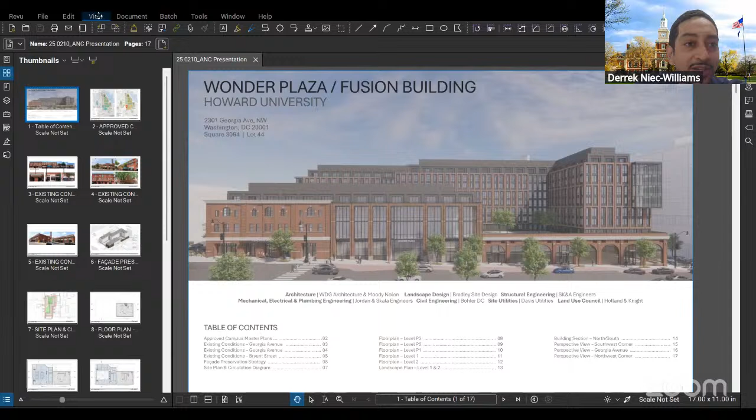As our counsel mentioned, this is further processing of a project already contemplated within our central campus master plan. You have a rendering of the project there, and the A&E team will run through the architectural details. If you jump to slide number 2, just to refresh everyone's memory on the project location, highlighted on the right-hand side with the red dashed line: it is Project J for Juliet, which in the master plan is known as the Fusion Building.

Programmatically, that building is in the master plan to consist of housing, inline retail, and a recreation and wellness center for the university campus—exactly what our project team is prepared to illustrate in terms of uses, configuration, and orientation of the design.

You might notice the notional massing here is an E-shaped plan that fronts most of the mass along the Georgia Avenue corridor, as contemplated in the 2020 master plan. You'll notice the orientation has changed, and we think for the better—we always try to improve the massing as we bring projects from master plan level into design reality.

This is one of a number of projects approved in our master plan, but it naturally sits on the Georgia Avenue corridor, right at the campus edge, and really needs to be a flagship for the university's campus.

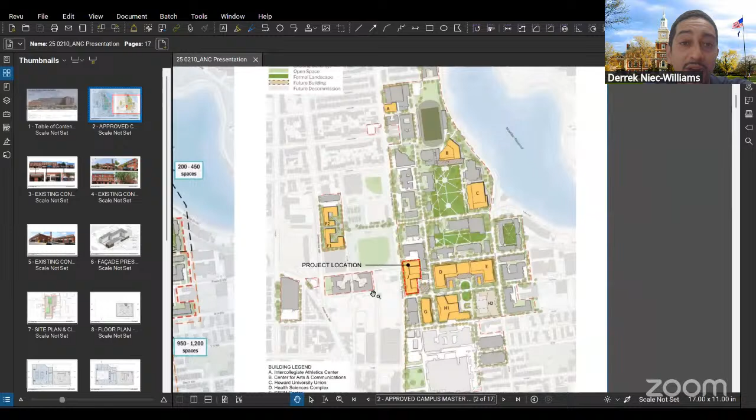Currently, campus recreation activities are all commingled with our athletics facilities on the north side of campus. The Recreation and Wellness Center seeks to decompress the north side for the 98% of students who are not intercollegiate athletes, and allow intercollegiate athletes more dedicated facilities that should enhance coaching contact hours and ultimately lead to more wins.

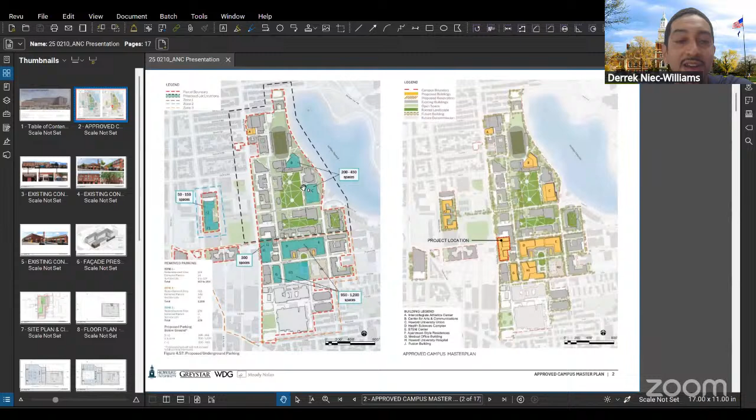So that's just an overview. The project calls for roughly 300 parking spaces per the master plan's parking plan, which I think we're approaching overall in by the numbers. The overall project concept here will ring true to what was called out for in the master plan.

As the design team brings you through the existing conditions and illustrates the historic preservation work we're doing as part of the project, you'll see why we believe this design is a great improvement on the original concept massing shown in the master plan. With your support, we look forward to developing this along the corridor to preserve relevant parts of the historic facade while infilling with new and vibrant uses. With that, I'll turn it back over to the A&E team to proceed.

Derek, can I ask you one quick question? Absolutely. Sorry, I just had a loss of thought here.

Was the zoning request for the change from MU2 to PDR to MU2 or MU4—whatever it is, I can't remember—finally finalized? The zoning commission did vote in favor of the modification, the map amendment. Final action will be on March 13th—that's when we should get the final order out, but we have directional approval there.

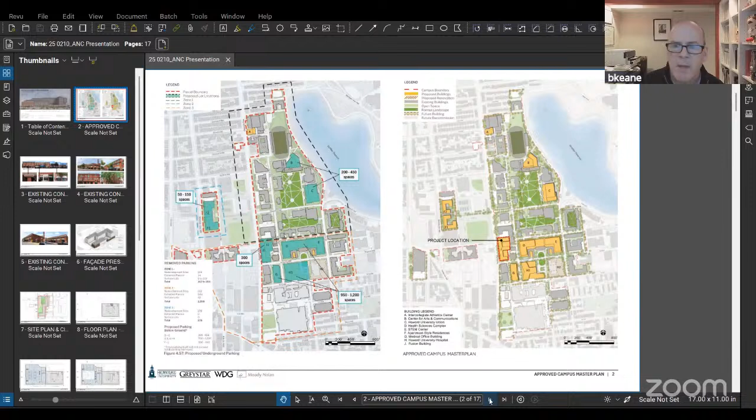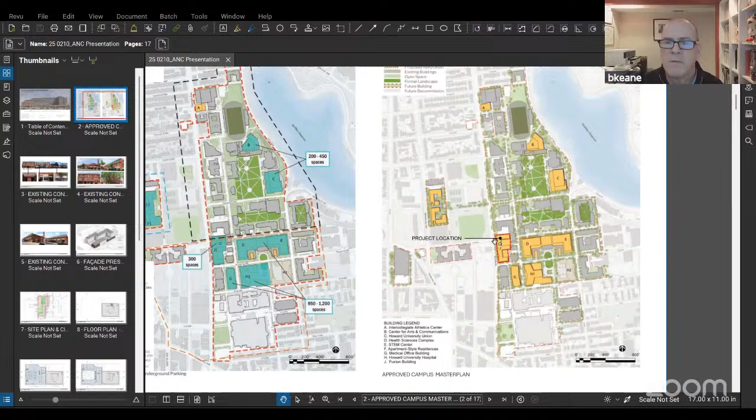As Derek teed this up nicely, he spoke about the fact that the master plan is this E-shaped building, where the courtyards were actually facing eastward. As you'll see momentarily, we've turned it around, and the courtyards now face both west and north. We pull the mass off of Georgia Avenue and highlight a couple of what we think are very special historic buildings that have been part of the neighborhood and the university for many years.

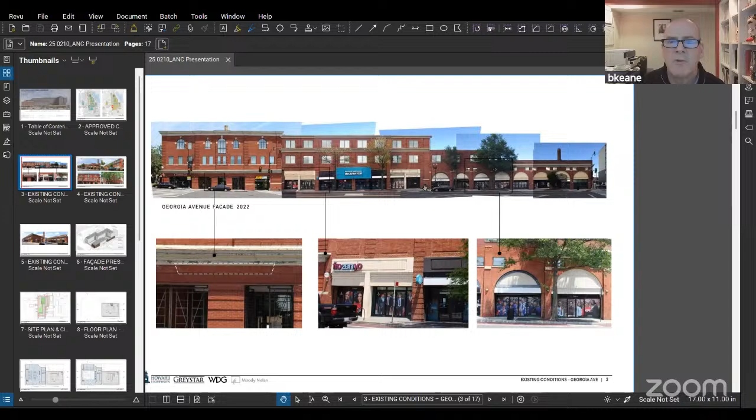You probably all recognize these buildings along Georgia Avenue. We're going to maintain the northwest building and the southwest building. We're going to remove the center building, which has been deemed somewhat chopped up and not contributing as much to the character of the neighborhood.

As we get to the corner of Bryant and Georgia, you start to focus on what I call the arched building. It's a very tall one-story building that used to have a bunch of bread trucks in it, as some of you know the history of the site.

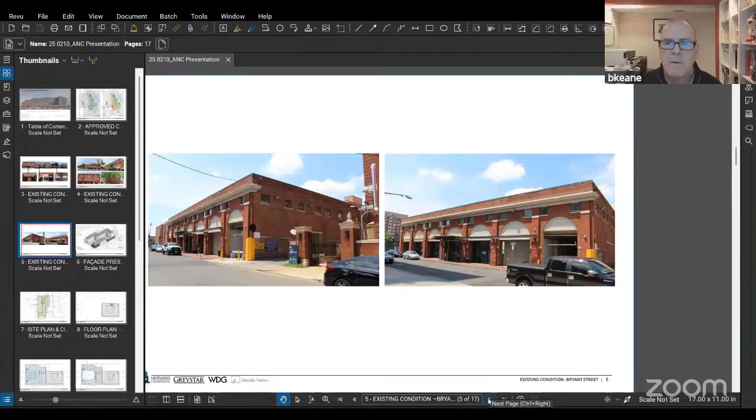As we go around further on Bryant, you get to the alley of Bryant Street next to the power plant, and the massing has changed dramatically. We've created what we call a stepping Z shape that has a prominent corner at Bryant and Georgia, but then it sets back and steps along the alley, pulling the 8-story residential tower back from Georgia Avenue and letting the two historic buildings shine.

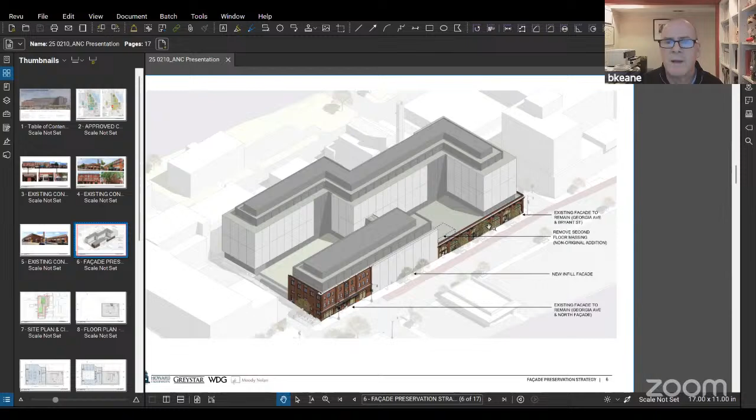Between the two historic buildings, we have a building facade that we call the infill building, and you'll see that momentarily. The site has a wonderful industrial history, and we've tried to honor that history in the way we approach the architecture.

This is where our residential entrance is. Students will actually enter the north courtyard, walk across it, and enter the building. There's a little 3-story link that connects the 8-story tower to the historic northwest tower and the infill building.

In terms of daylight, this new south courtyard is going to get wonderful daylight with south and west sun coming directly in. The north courtyard will get some shade from a 3-story wing, but 3 stories isn't too bad in the scheme of things.

As we continue walking around the building, there's a second residential entrance off of Georgia Avenue. There's about an 8,000 square foot dining facility off of Georgia, and about 12,000 square feet of retail entered from Georgia Avenue and Bryant Street. Entering the parking garage will happen off of Bryant Street and off of this alley, as well as loading.

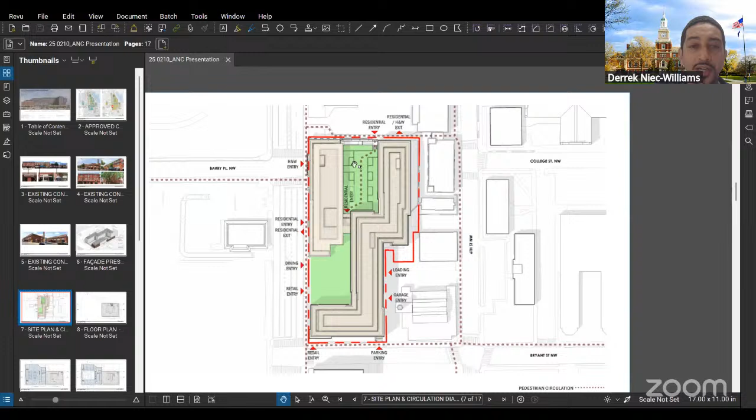In this setup, you're able to have a cloistered courtyard that serves as the residential entry, providing a buffer from the hustle and bustle of the Georgia Avenue corridor and likely better pedestrian safety. But in addition, roughly one level above the Georgia Avenue corridor, there will also be another courtyard that daylights and fronts onto it, overlooking that corridor. That provides opportunity for see-and-be-seen, summer programming, et cetera, which I think will breathe more life into the corridor than just a straight curtain wall of a building.

I just thought I'd point that out because we thought that was a great amenity that will greatly enhance the corridor and provide some differentiated environments for folks.

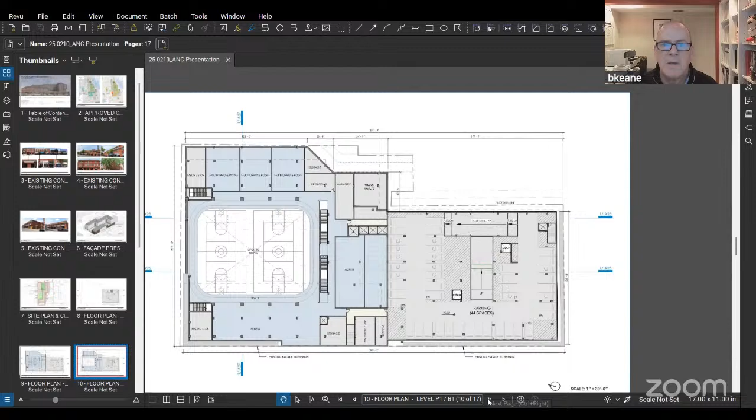So we come up to the next level of parking, and again you're looking down into the gym. There's a running track around the courts, and you start to see multi-purpose rooms, administrative offices, and some other fitness space. You go up to the next level, and we're now at the Georgia Avenue level.

As I mentioned, on axis with Barry Place is the entrance into the health and wellness. There's going to be a juice bar that's very visible to Georgia Avenue, a pro shop that's very visible to Georgia Avenue, and a gaming area that's visible to Georgia. So the intention is pretty clear that we're really trying to activate the Georgia Avenue frontage, and the programming at the health and wellness is going to do that.

This is our second residential lobby for students that are not coming in from the high campus level entrance above—they can enter off of Georgia Avenue. The dining facility I mentioned is right here, about 8,000 square feet. Retail is about 12,000 square feet, with entrances wrapping the corner of Bryant and Georgia Avenue. You can go into the alley and down a ramp into the garage, where trucks will come in and do loading and servicing to the building.

Also, one other comment is that the dining facility shown in that light yellow color is not an exclusive, student-only venue. It's intended to be open to the public, but it'll offer different food options that are more price sensitive to our student population. So I just want to highlight that it's not a restricted access thing—it's something where the public can come in and purchase meals alongside students.

So as we get up to the courtyard level—as Derek was describing, this is a tall 1-story, so you're about 20 feet above Georgia Avenue when you're on the south courtyard. As students come in and cut across the north courtyard, they'll enter the building into a lobby.

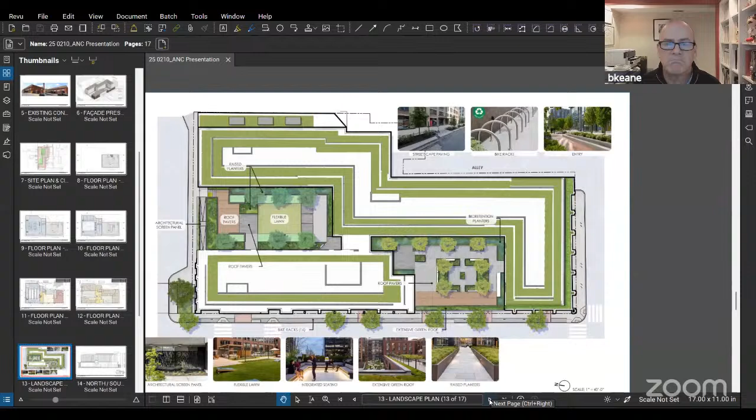You can see the tall basketball court volume is completely below grade, and you see the running track, the dining, the retail, and the 3 levels of parking. So it's a pretty intensive program in section, with a lot of things happening below grade.

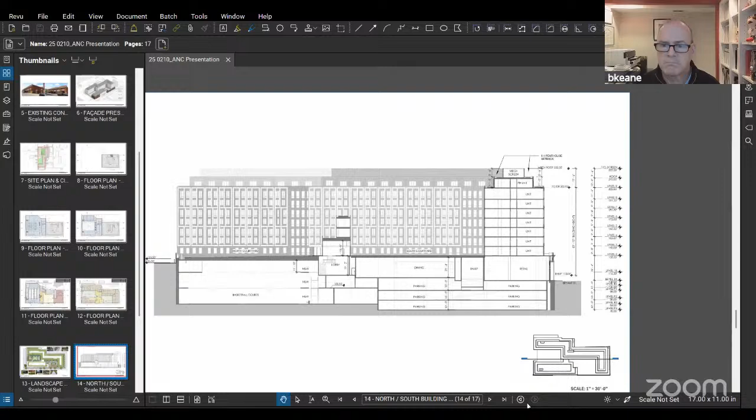So these glass openings are going to be set into the wall about 3 feet so that when the doors open, they're not swinging into open space. So the building's going to have a lot of depth.

And then you see the infill building, and then you see the other historic building off in the distance, and we'll see that in a minute. And so we developed this double height masonry grid system that has a slightly irregular pattern, which we think gives it a nice kind of dynamic quality.

And then on the corner, we've developed what we thought is kind of an interesting acknowledgement that this is a gateway intersection for the university. So we created this more transparent, glassy element on the corner of Bryant and Georgia.

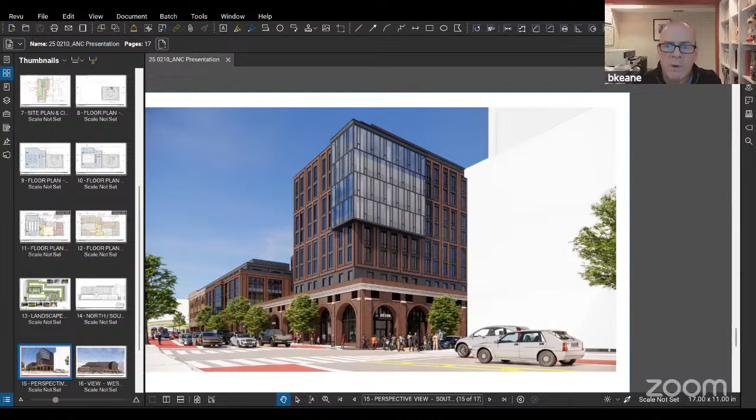Obviously, the courtyards are not developed in these views, so more to come on those, of course. But I think you get a sense for the overall composition.

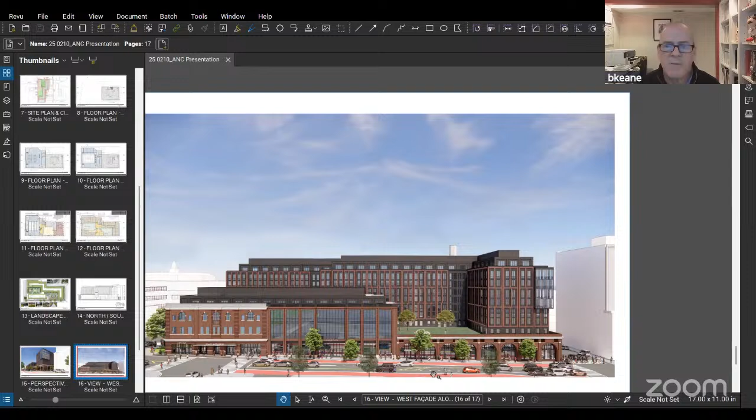And you get a sense, if you could imagine, the master plan had this as just a giant wall. And what we've done, I think, is a much more delicate, much more sophisticated approach, which is maintaining the historic character of the site and of the neighborhood and of the university, and sort of pushing the mass back off of Georgia Avenue, which we think will make a much more pedestrian-friendly environment.

And then students will be traversing through this parking lot, through the passageway towards 6th Street, or they will cut into the north courtyard and walk across the courtyard and enter the building.

We're obviously excited about the project. The development's come a long way. It's been a pleasure working with Derek and Howard University, and of course Greystar Development as a great team. And we'd love to hear your comments.

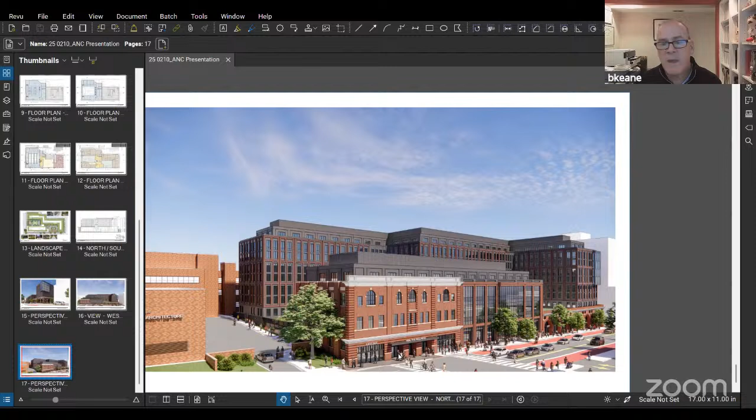That's the condition today, and so students will get on that walkway and then they'll step up onto this courtyard, or they may already be down on Georgia and they can enter off of Georgia Avenue. There's 2 means of access, one from Georgia Avenue and one that's cloistered in the courtyard that's behind the historic building.

Okay, so then, Derrek, maybe you can answer this question, and I'm just trying to think through some stuff here. That walkway is not a permanent, it's part of Howard's property. So what is the potential for down the road that might it be an issue relating to doing something with that parking lot and creating a building?

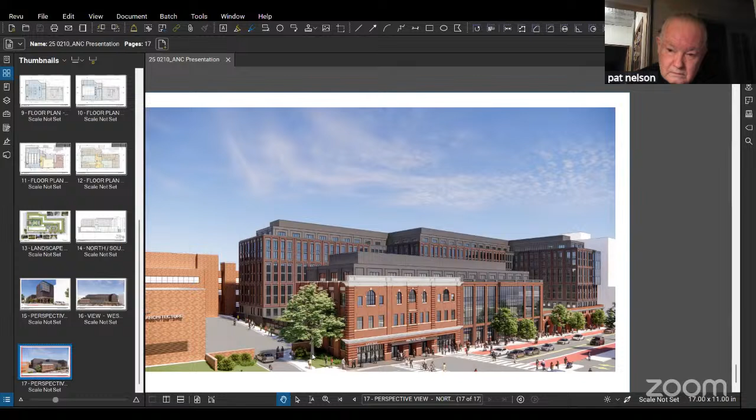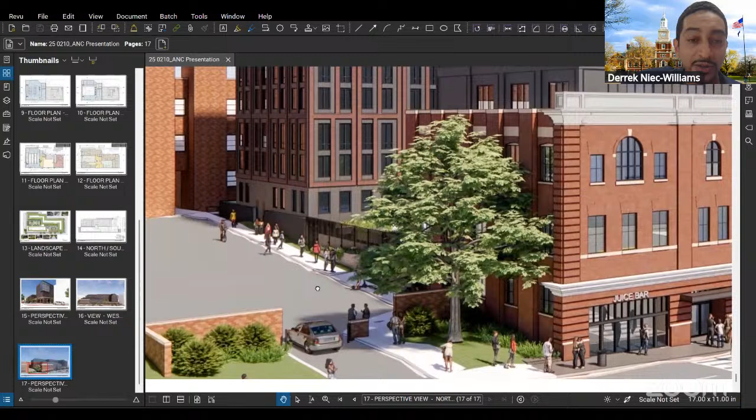I think that's a major pedestrian connector. If you watch during the normal academic day, a huge number of students, particularly those living in Howard Plaza Towers on Berry and those residing in Trellis House, cut through this corridor. Through this project and other means and methods, we really seek to memorialize and further improve the pedestrian environment in that corridor. There are no plans to knock down the College of Engineering building or the parking lot that serves it, so through this project we should greatly enhance that corridor and improve the student experience along it.

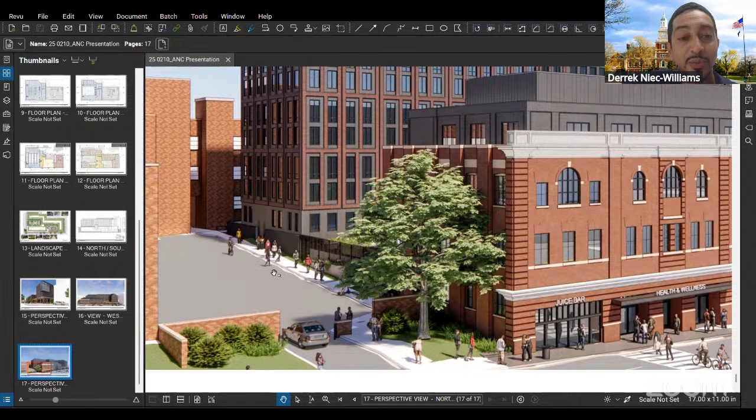So it's not as much an afterthought as a pass-through because of the convenience of the number of steps it takes, but it actually becomes a place that's more significant and memorialized. On one side it's a surface parking lot, but on the other side there'll be a beautiful, wonderful courtyard that students will have access to.

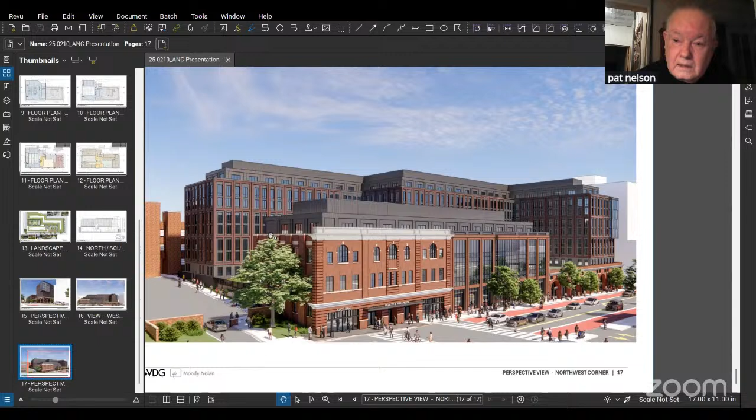So then my last question, since you are changing around the design of the building, and I understand that makes sense, I'm fine with that. Is there thought to expanding the sidewalk and beautifying it to make it more of a pedestrian way, maybe putting some tree elements in there to make it really look like a connector between 6th Street or 4th Street and Georgia? Because right now it doesn't come straight through except for that little opening there.

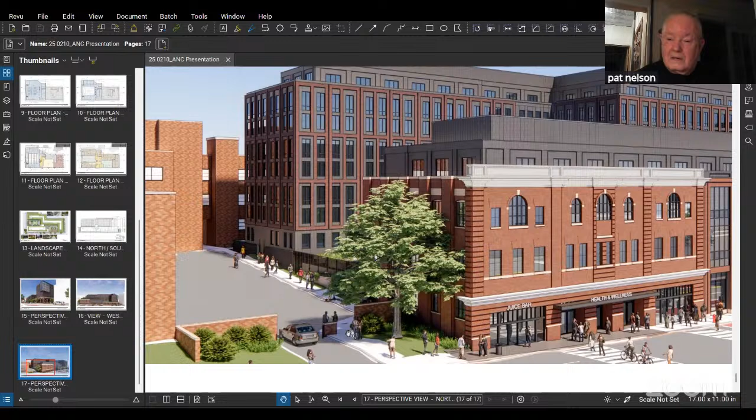And if you're doing this as a walkthrough, I think at this point, if you're doing major construction, you'd want to do something to either take away some of the parking and make the sidewalk wider, and put some tree boxes or seats or something, just so it really becomes the pedestrian way you're talking about.

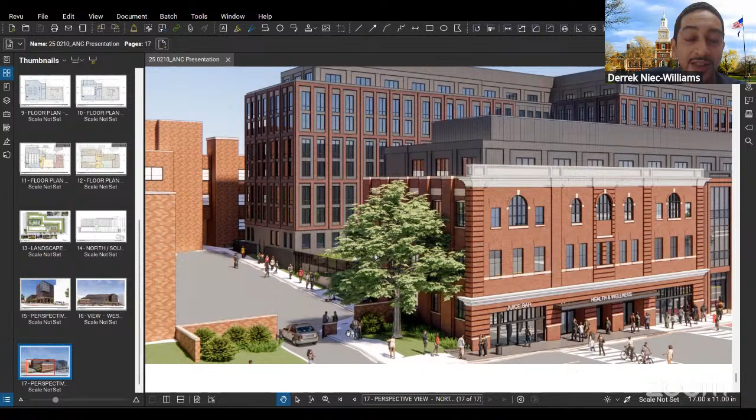I think those are all things we can explore. On the other side, you'll have faculty with their pitchforks and torches, not happy about losing their parking, so we'll have to balance the outcome there. But I think there's definitely a way that pedestrian environment can be improved through this project and through coordinated action. As we get further along, I think that's something we'll definitely look to realize on the job here. Thank you, Pat and Derrek.

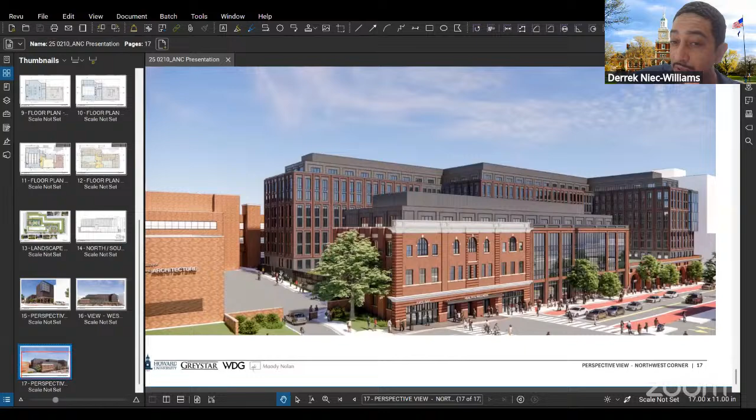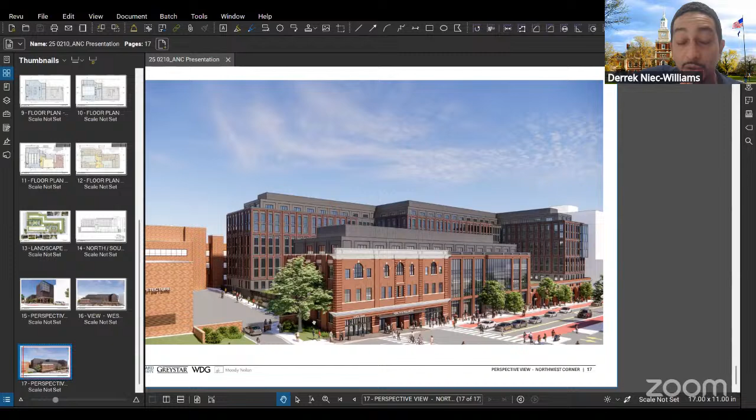Sorry, to your earlier question about the sidewalk, I don't believe we are greatly increasing the depth of the sidewalk. I'll let Bob or Chloe speak to that more specifically, but given where the historic facades are placed, and the fact that we're not moving them, we could technically notch back a little bit, but it would create a disjointed, not continuously consistent width along the sidewalk realm there.

The answer is, the historic buildings are kind of holding the original building line, but we are in fact creating more elbow room on Georgia Avenue because we're pushing all these facades back at the street level. As I mentioned earlier, you can see this is about a 3-foot deep archway now. The facade used to be right on the face of the building line, and now these are all pushed in 3 feet. So starting from this point down, there is in fact more area on the sidewalk, opened up so you can actually walk through, where right now you just walk on the sidewalk.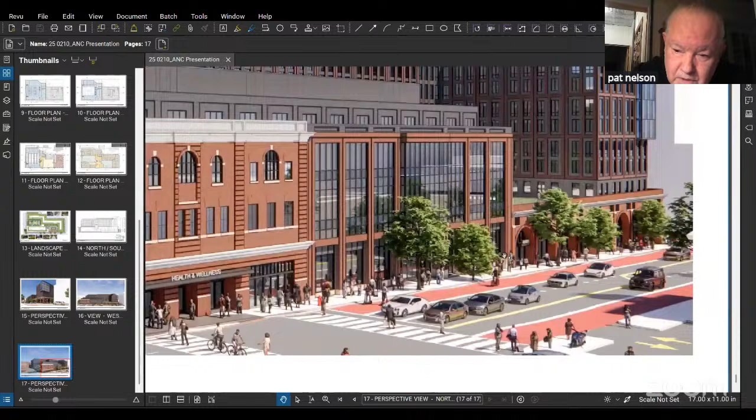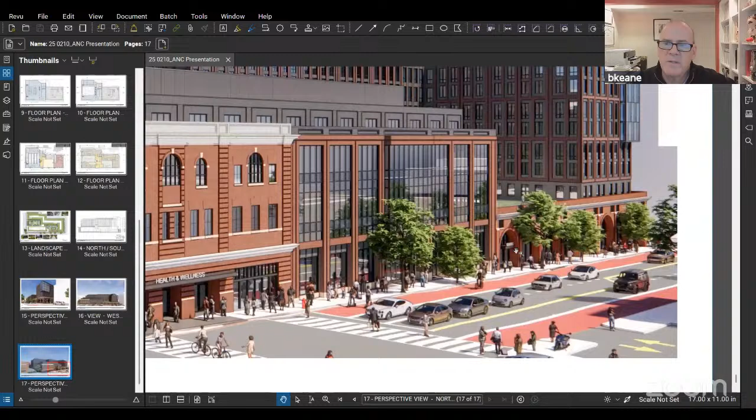It's a series of deeper openings. It's not like the sidewalk is wider so you can walk straight down — you can't really experience the space that way. But if there are tables and chairs outside a dining facility or one of the retail facilities, there's going to be a little additional area for tables and chairs on Georgia. So basically the superstructure, the brick, is right at the property line, but there will be more alcoves, I think is the right term to use.

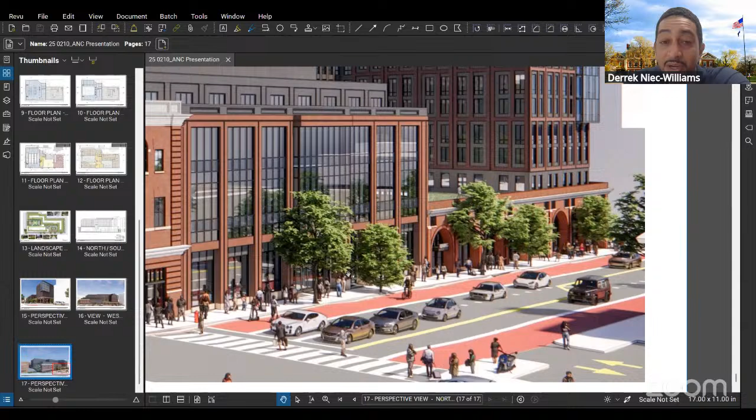Yeah, that's a good word, step down the corridor south of the northern historic facade. So to answer your question, it's like yes and no. Will it feel more open? Yes, but will it actually be a contiguous sidewalk that's wider? No, the columns will have to stay where they are. We've pushed the curtain wall facade back a little bit so there's more alcove space, so the public realm feels larger and there's more elbow room to maneuver. I think that will greatly help with wheelchair navigation on this particular block because there are some pinch points that are a little bit outside of DDOT's standards.

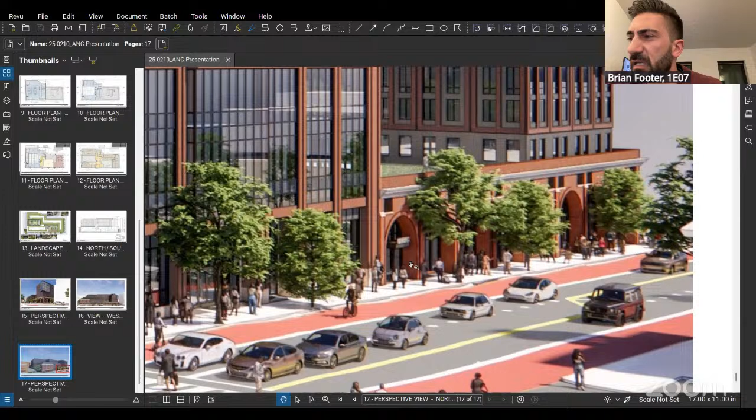Just for clarification, I'm looking at the current structure right now, and it is set back—the windows are not flush with the brick, particularly in those archways. There's some white concrete or something that's almost flush, but where people go into the actual storefront, it looks like maybe about 1 to 2 feet. Are you just suggesting you're going to bump it back more? It's about a foot, you're right. It's going to go from 1 foot to 3 feet. Cool, okay, just wanted to clarify.

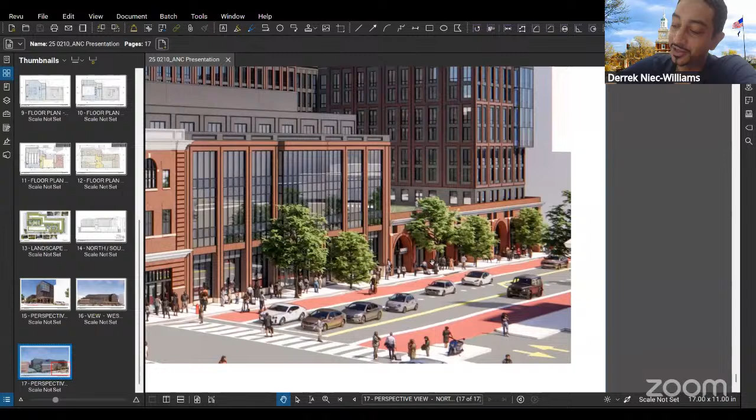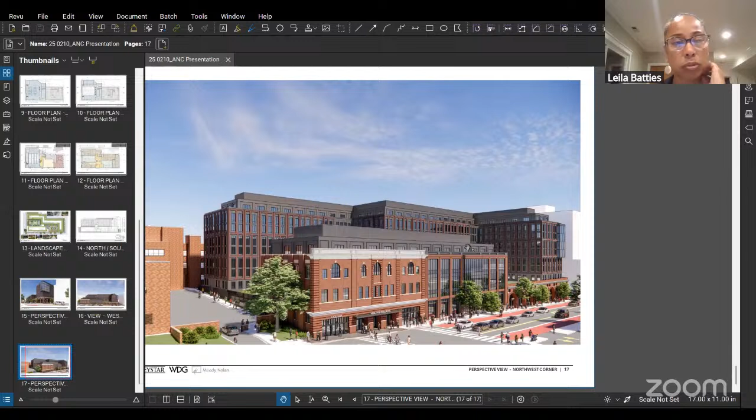And just to follow up on that, when is it expected to start? You'll see some kind of preliminary construction, facade bracing or whatever, as early as this summer, July. And then major construction won't take place until later this year, October, November.

How is that going to coordinate with the site across from that, Brian? Was that ever resolved about what they're doing with that? I was just about to ask that question. So you're right, guys, no, you're great, thank you. Are you guys coordinating with the developers across the street, which are Howard University developments, around the construction plans and mitigating any disruption, and just learning from some of the issues they've been having with DDOT about covered construction walkways, things of that nature?

Derrek? Yep, so we convene all of our development partners periodically—I'd say at minimum once a quarter, but typically monthly—to do just that, to compare best practices, to talk about staging areas, etc., so that we can all have enough elbow room to get the work done without disrupting the flow of things in any major way for both the university as well as the surrounding neighborhood.

So it might be worth convening them again if you haven't done it in the past 2 months, because they've reached out to me. I've gotten involved with DDOT around some of the ridiculousness they've asked your developers to do, and I'm totally on board with what the development team's been doing. After all that transpired, I asked if the two construction sites have been communicating across 8th Street, and they have not. So I understand what you're saying, Derrek, and those are very nice words, but can you show me that? Because they're not right now. Yeah, sure, absolutely, I'll make sure to circle back with you specifically on that item. Yeah, that'd be great.

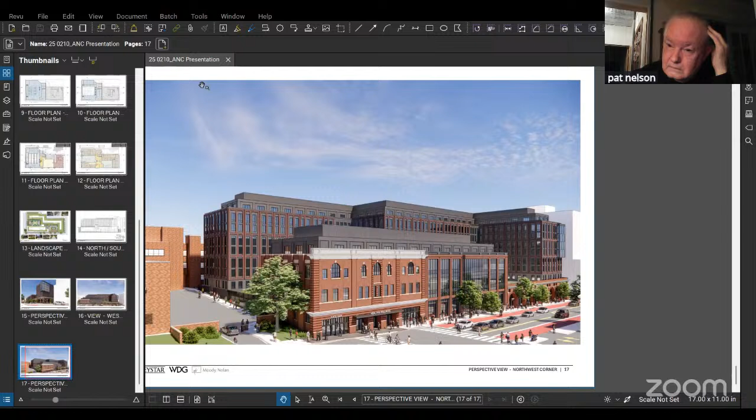And Commissioner Footer? I don't want to distract if anyone else has any comments, but I do just want to say that I like the new design. I've always been kind of an advocate of the university. It would be lovely for the university to open up a little bit more towards Georgia Avenue, and I think this is really meeting that. So thank you for this new design.

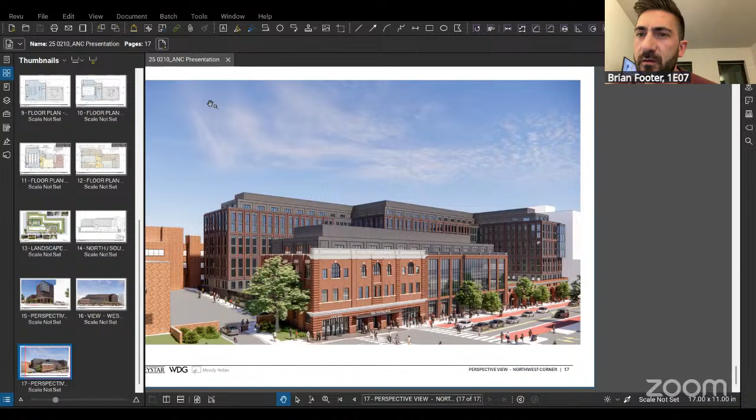With that in mind, I am not as familiar with the old design, but did we lose any residential units with this new design, the step Z rather than the original E? Your question, Commissioner Footer, is whether or not did we lose residential units with this design? Yeah, I don't believe that we did.

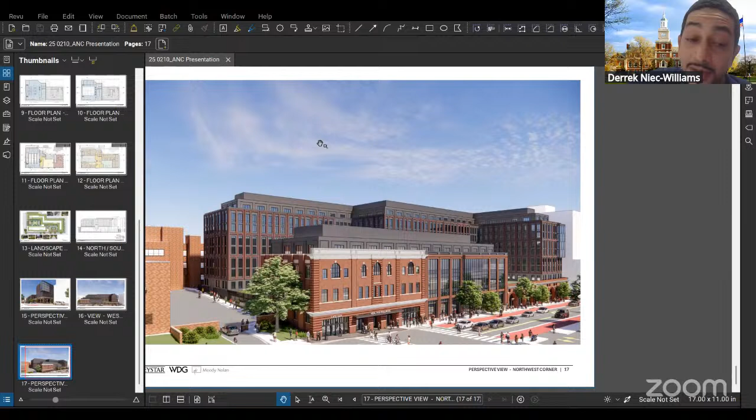All right, awesome. Because we've been advocating and hearing from students just how great it would be to maintain or to have students stay on campus and increase student housing, and you guys are meeting that demand with this. This is fantastic. Yep, and to that point, to get to this point with the project, we actually surveyed the whole student body for market demand, price sensitivity, amenities, etc. So it's been a very interactive process, and I want to thank you for pointing that out.

All right, did you mention how many units or student housing units are proposed? I know that's probably changed since you redesigned it. 592 beds, about 280 units, not rooms. And then at this point, and I'm sure we're way ahead of the schedule here, but what is the makeup of that? Are they dorm style rooms? Are they single rooms? How are you planning to have the beds?

They're apartments, actually. So there's 4-bed, 2-bath apartments, 2-bed, 1-bath apartments, 1-bed, 1-bath apartments, and studio apartments. They're intended to be for upperclassmen, but it's probably open to all students. They're apartment style with full kitchens, and I think the prevalent unit type is the 4-bedroom, 2-bath and the 2-bedroom, 1-bath. That's the majority. There are some studios and some 1-bedrooms, but by and large, that was the housing type that was able to meet the price point and was most highly in demand. And also, those are private student rooms, not shared occupancy. So that's another element to it.

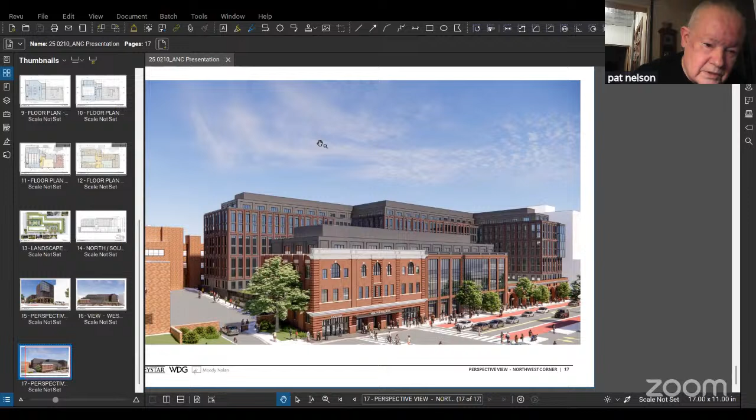Teresa, to either Commissioner Footer or Commissioner Jacobson. Does this have any of the numbers relating to housing? No, Patrick, that's in the full set we filed with the zoning commission. I can send you the link, it's online. Then I can go and pull what I want to look at. Okay, thanks.

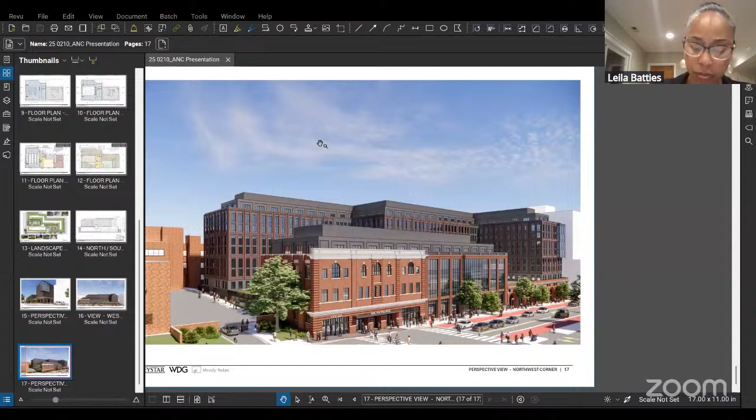I'm sorry, I do have one other question, Commissioner Jacobson. Go for it. As you guys are doing this, you mentioned it's along Bryant Street. Are you guys going to do anything with the actual Bryant Street itself?

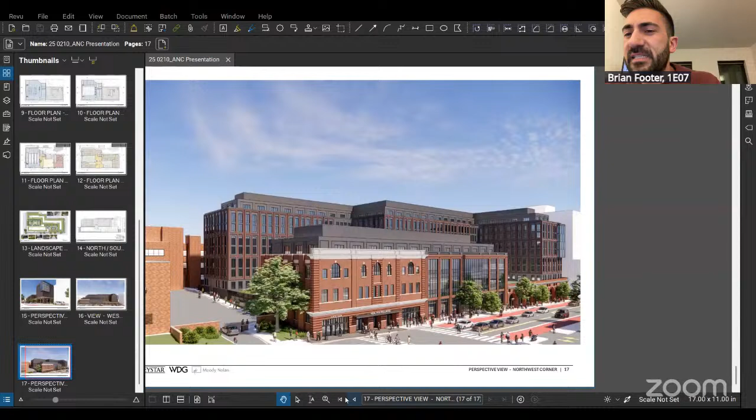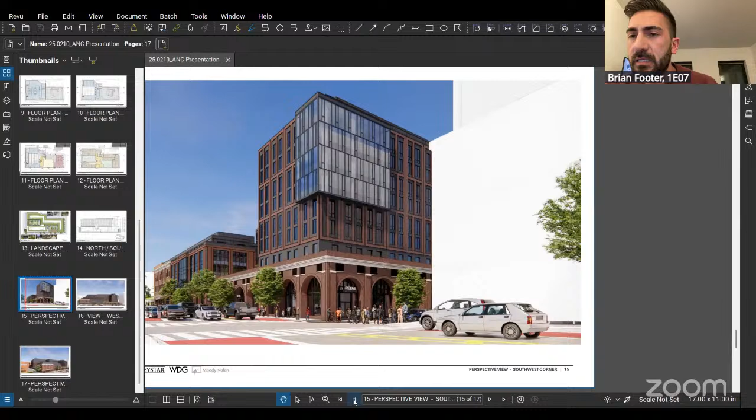I know I'm a broken record, and Commissioner Jacobson and I are both broken records, but we love fighting for bike lanes in our neighborhood. Bryant Street was identified through Commissioner Jacobson's research as a great opportunity to increase dedicated bike lanes for east-west connectivity, which is severely lacking throughout the city. With the new Bryant Street opening up with the development across the street and the great stretch across campus, I just want to continue bringing up the idea of having bike lanes on Bryant Street.

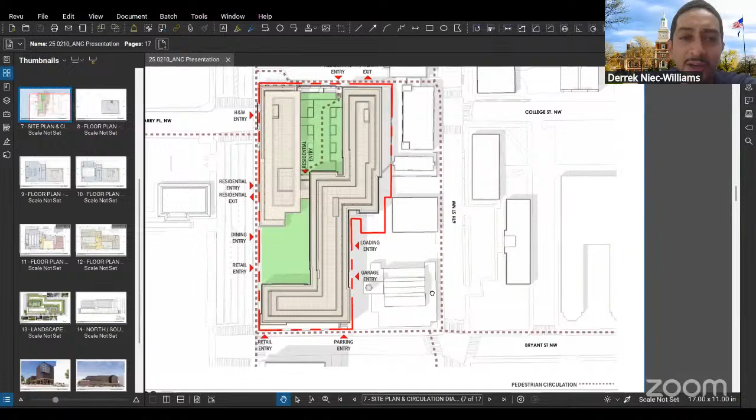Got it. I don't think that was something our development team contemplated as part of this project. Bryant Street is a public street between Georgia Avenue and 6th Street. When it hits 6th Street, it transitions into a private roadway that the university owns and controls all the way to 5th, then it picks back up again. So there may be some added flexibility, but I wonder about DDOT and how they'd view that, given they don't necessarily control or have the ability to maintain a bike lane on private property. That's the only potential monkey wrench that might present itself. But otherwise, I don't think this development team contemplated it, but I also don't think we'd take it off the table.

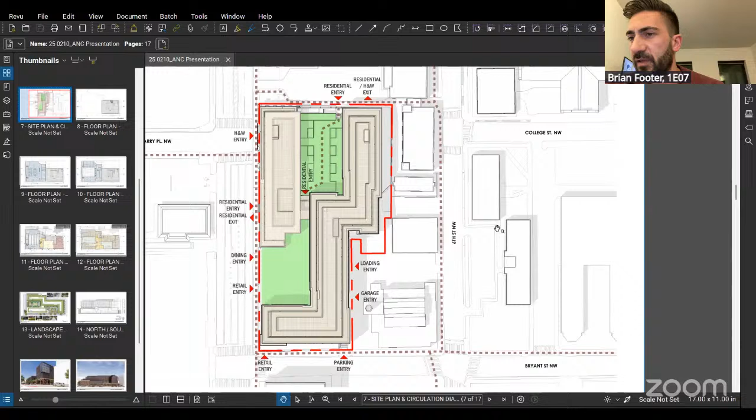We'd be happy to facilitate a meeting between DDOT and Howard University, because they said something similar, that they're up for it but don't think Howard would be. Maybe this is a great way for the ANC to bring partners together to figure out a comprehensive plan between private and public property for bike lanes. Zooming out, that naturally speaks to the whole network, not just this project. That would be a useful conversation to have. In our master plan, we contemplate different multimodal opportunities along 6th Street to make it more pedestrian friendly, and that may play well into the Bryant Street corridor.

So let's set something up, we can work through Teresa to maybe get Derrek involved. I wanted to remind you that your traffic engineer is on the call, so he can speak too. Good stuff. Yes, Jerome Slade is on the phone.

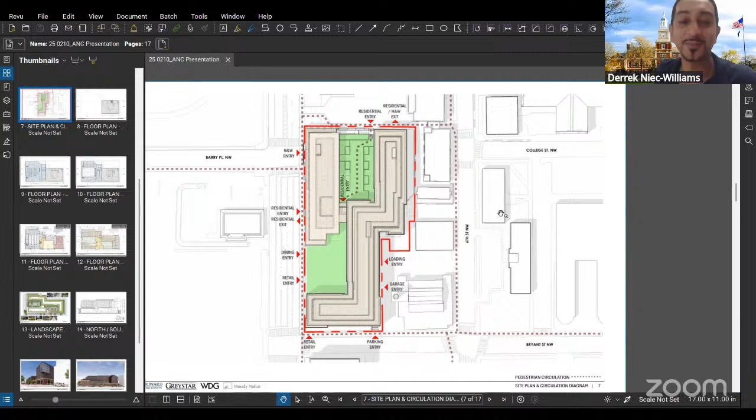Related to Bryant Street, in the master plan it was contemplated to be converted to two-way at one point, but obviously we don't have enough real estate to have two-way traffic and bike lanes. As part of this project, we are not converting Bryant Street to two-way. The master plan contemplated that other projects down the line would essentially be tasked with converting Bryant Street to two-way, but not this project.

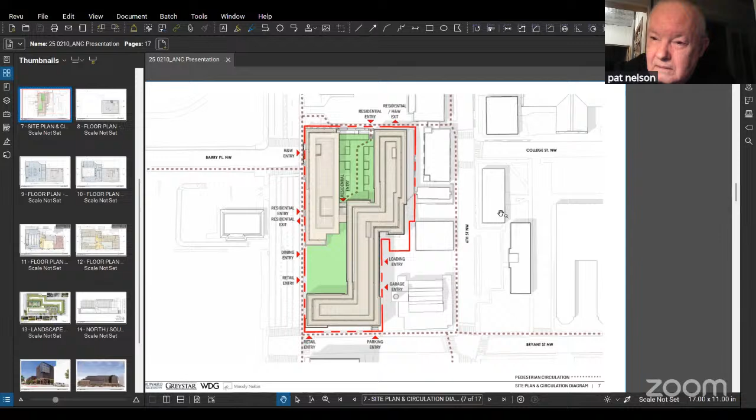Let me build on what Brian just said, I just thought of another question. Since you're building this new building with underground parking, which is wonderful, are you planning on having bike storage and facilities underneath the building to store bikes?

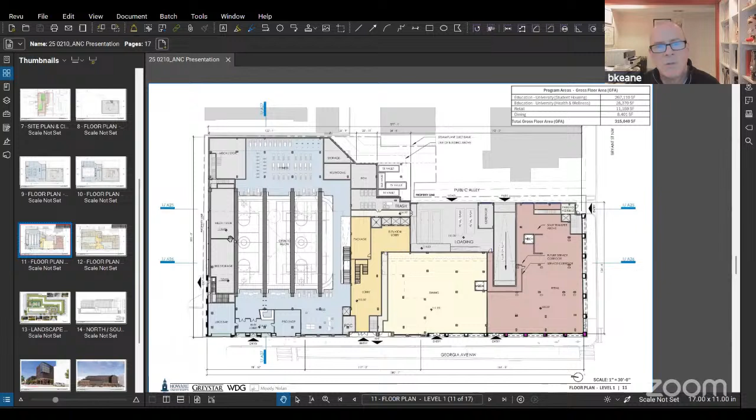I think that's part of some of the requirements, I'd have to look up in the code what it says, but Bob can speak to that. I kind of missed that as I was walking around the ground level, but this gray box right here is bike storage. So as students are on that walkway, they can take their bike right into the bike storage. It actually sits between the two very large beams that span the basketball court, that's the space for the bikes.

Erwin, can you confirm we actually exceed the long-term bike parking requirement? Yes, that's correct. Based on the zoning requirements for the university use, we do exceed the long-term bike parking, and we're maximizing as much real estate on both Georgia Avenue and Bryant Street for short-term parking where we can fit it and where it's appropriate. Do you have an idea of how many bike spots will be available there?

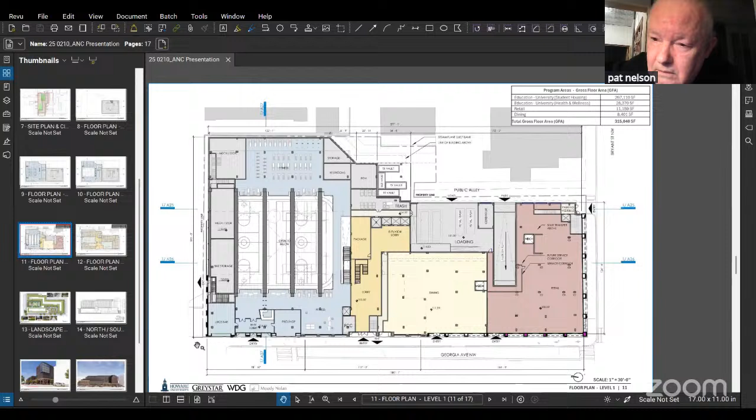On the long-term, Pat? Yeah, we do have that number. Erwin, you want to look it up? Yes, I'm pulling it up right now. Just give me a few seconds here.

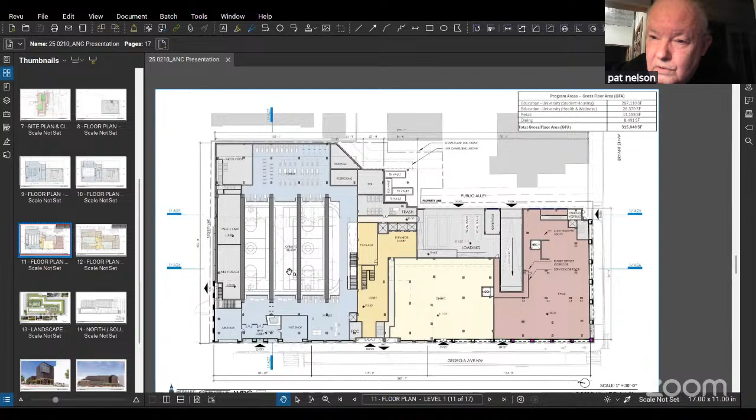And while he's looking that up, to build on what Brian was saying, I think we need to look at the bigger picture and the connectivity of what's being done with some of these long-term projects, because we have the street that was put in between - let me get my numbers right - 8th and 9th Street.

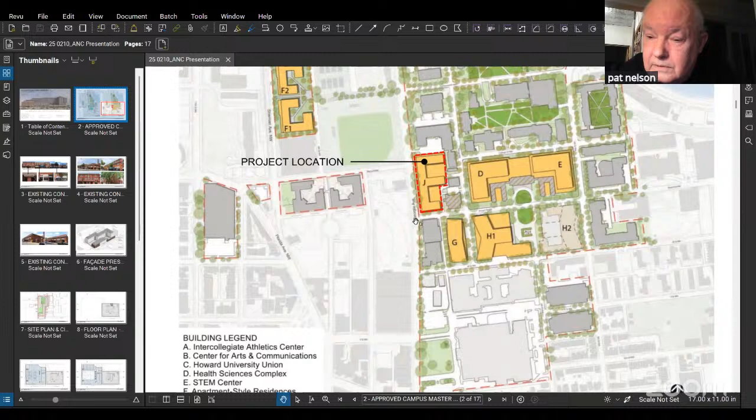So we are providing 109 long-term bike spaces, which are the spaces in the bike room, and then 32 short-term spaces, which are out in the public space.

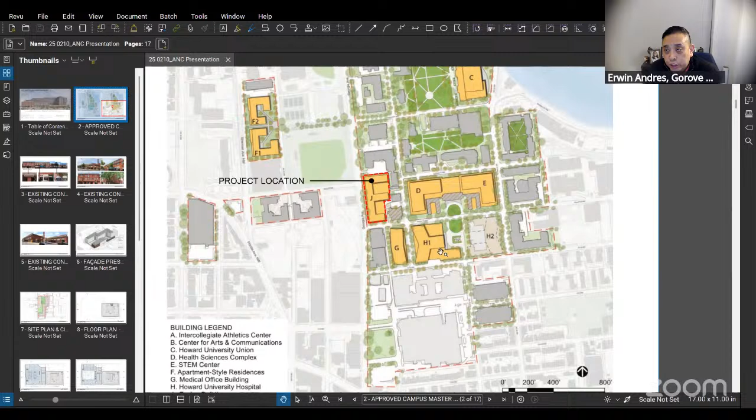Okay, and those are for student use, I would assume? So the indoor ones are for students. The outdoor ones are for the general public, both for students and anybody visiting any of the retail establishments. Okay, that's good. That's a huge number. Yes, it's pretty significant.

Does that make sense to what I'm saying, Brian? I'm trying to connect the dots here. Yep, 100%, I agree. You're referencing W Street, which will connect across Georgia Avenue and basically 8th Street, because the new W Street was built with the reverb, and then Bryant Street, which is to be built, will connect Georgia, basically, I believe, to Florida or Sherman maybe. It's gonna go across behind the Whole Foods, piece has one part of it. And then between 9th and 8th is supposed to be a road, and then between 8th and Georgia, there's supposed to be - right - supposed to go all the way across.

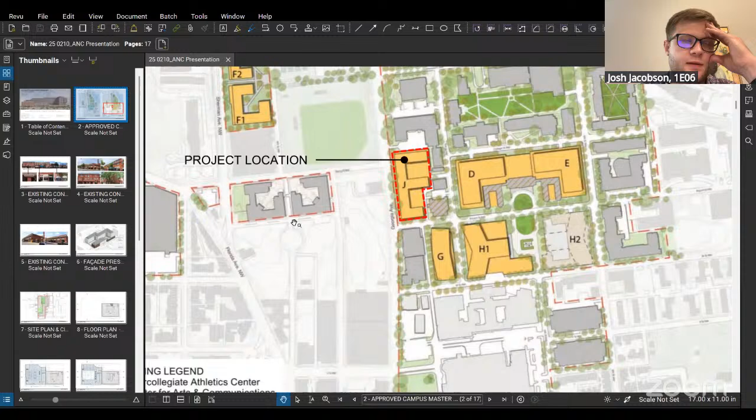Yeah, I think it's a one-way from Florida to 9th, or Florida. Yeah, but it still has the ability, because that's a two-way street, which makes sense, that two ways of traffic makes it less for a bike lane. But when we lobbied for this whole thing originally to get that to be a one-way street, it was thinking that long-term vision was to be able to have the ability to put in a bike lane on that. So Bryant Street up top should be able to have it.

Good to know. You just need to connect that dot with DDOT, because sometimes they don't - somebody comes and somebody goes and we lose transition. Thank you for that, Patrick.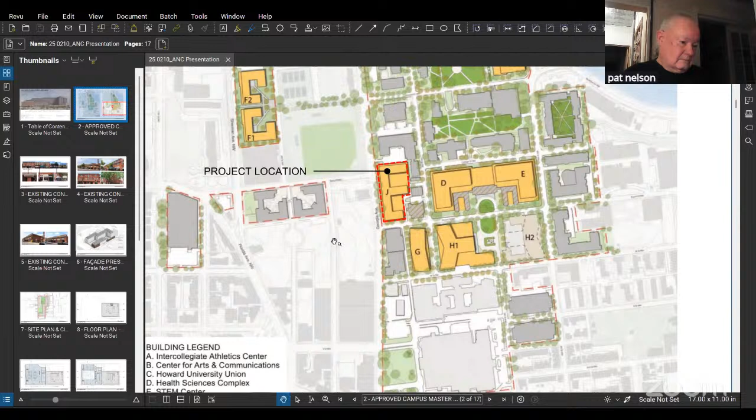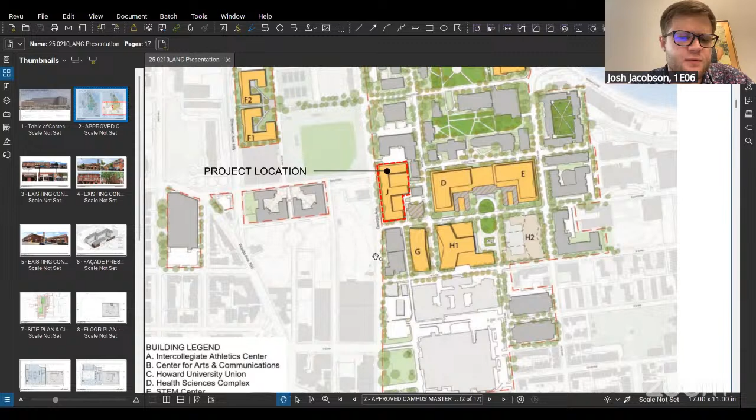Commissioner Jacobson, happy to work with you in the transportation committee to start to set some of that up. Yeah, happy to. And I think actually in our resolution for the - oh God, I can't remember what the project on the other side of Georgia is called - but I think in that resolution we had mentioned DDOT should consider bike lanes over there too. So it helps connect with some of the other things we're working on. But thank you for bringing that up, Commissioner Footer.

Any other questions from the committee or from attendees?

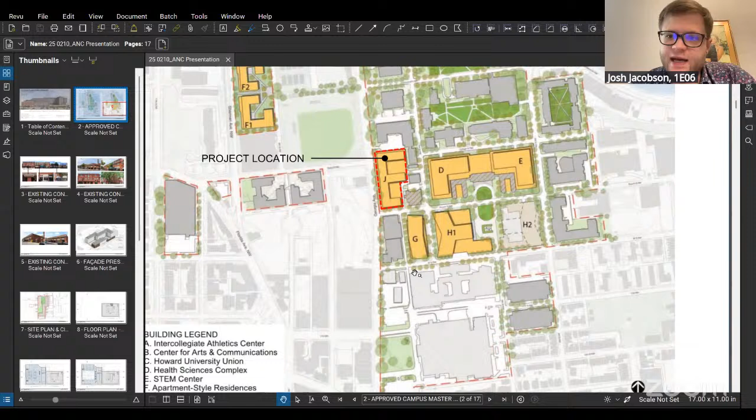And then I guess for the Howard folks, what would be best from us tonight? Are you looking for some sort of - oh, go ahead. We're asking the committee to make a recommendation in support of the project to the full ANC so that we can present to the full ANC. Is it the 26th?

So you're asking for support for concept and design? Yes. The support of the application is really just support of the further processing application, which includes the project design, which is going to the zoning commission via the campus plan.

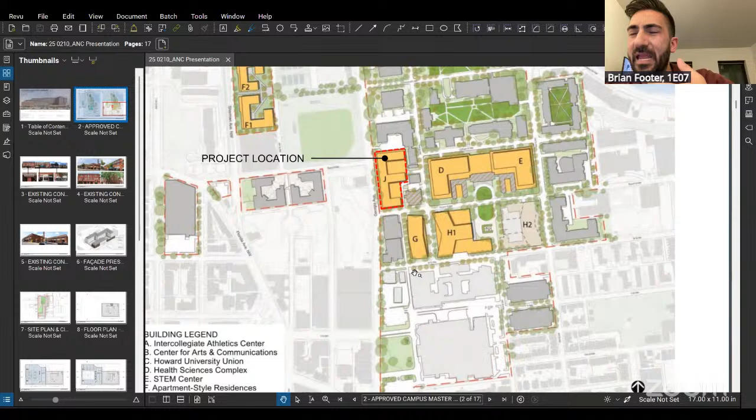Yes, the further processing of the campus. Gotcha, just for my own clarification - there's no amendment to the campus plan or any zoning variance or anything, it's just design and... It's design. We do need - we are requesting relief for the outdoor plaza area, just because there's no space on Georgia Avenue.

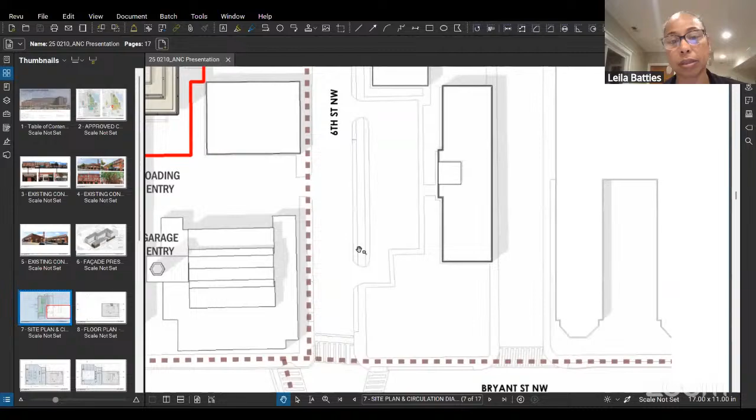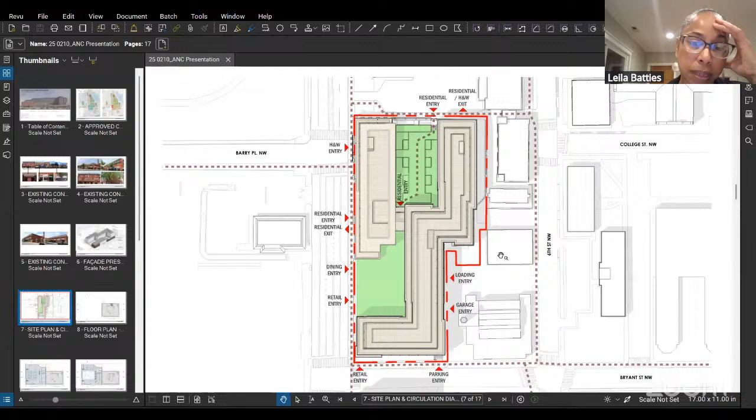I mean, it's just because we're maintaining that building line and the existing building facade. That would be the only area of relief. Under the regulations, I think it's 8% of the square footage required to be maintained as an open arcade area near the building entrance, but we compensate for that in other ways.

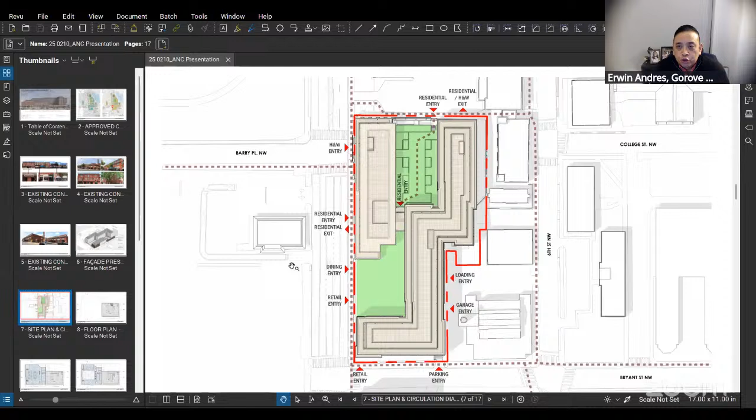Because of the building facade we're preserving along Georgia Avenue, we're not able to meet that requirement. And then we also need some relief for the short-term bicycle parking, which we'll make up for by exceeding the long-term bicycle parking requirement.

How far off of the 8% is it? I'd have to look that up. Are you asking for the short-term requirement? No, he's talking about the plaza requirement. Bob, do you have that number readily available? Otherwise we can look it up, it won't take long. Or Chris, if you can look it up.

Just so you know, usually the zoning commission doesn't take into consideration anything less than 10%. If it's over 10%, then they'll question it and hammer them. But since this is less than 10%, they still need to mention it, that we're supporting that, but they tend to not have real issues with it.

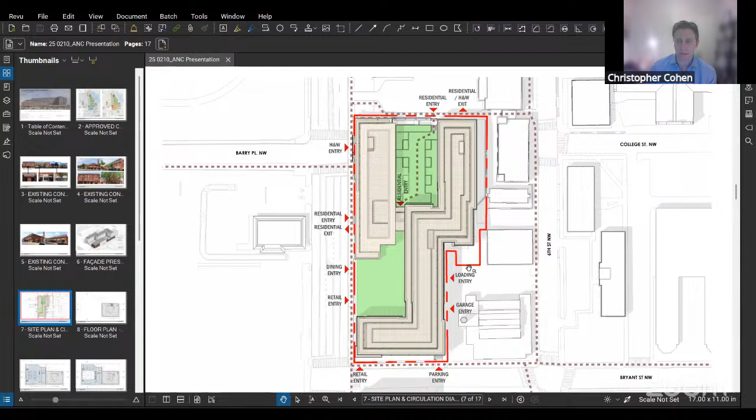Are you able to look up that number for the plaza requirement? So the requirement's 8%. Hi, Chris Cohen for the record. The requirement's 8%, but we're gonna have to get back to you on what we're providing. The 8% requirement derives from the MU10 zoning.

Right, but what is the request in our application? We've requested a waiver or relief. It's a special exception - the further processing application is being processed as special exception. I don't have a number for what the deviation would be. Okay, we'll get that back to you.

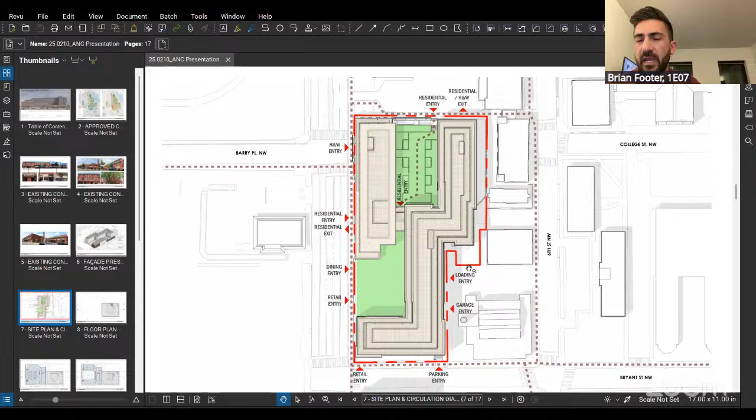So the two things you're asking for - the special further processing is a special exception itself, and then we will need relief from the bicycle parking and the waiver of the plaza requirement. So none of those are area variances, they're all special exception. And you're making up for the waiver from short-term with long-term. Correct.

That zoning hearing is what date again? May 5th. Okay.

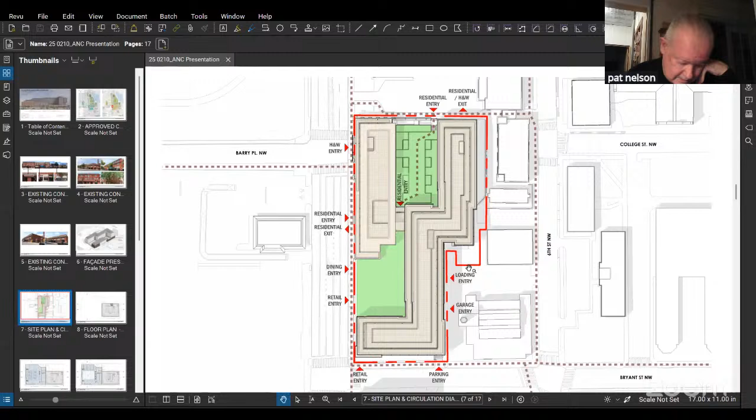If nobody has any further questions or comments, I would like to move that the committee recommend to the full ANC that it supports the further processing of the project in the campus plan, I don't know what this is called now off the top of my head. It's called the Fusion Building under the campus plan. So I'll say the Fusion Building for a special exception for the plaza and the bike requirement.

Second. All right, since we still have a lot of the Howard folks on here, everyone that's on the committee, raise your hand if you're in favor. And raise your hand if you're in opposition. Any abstentions? Looks like it was unanimous.

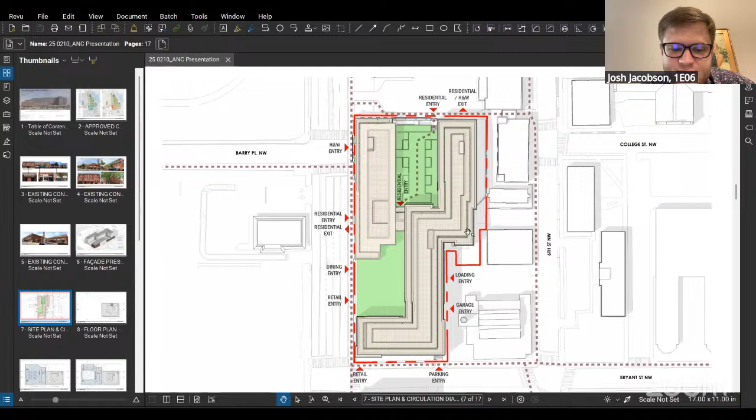Any questions, comments, concerns? Just one comment that I look forward to setting up the meeting to discuss the broader transportation piece, and want to highlight that we have a fairly new transportation director, Michael Mason, who comes to us from Louisiana State University. He's about 2 to 3 weeks in, so I really would love to get him and hit the ground running with the group. Looking forward to scheduling that.